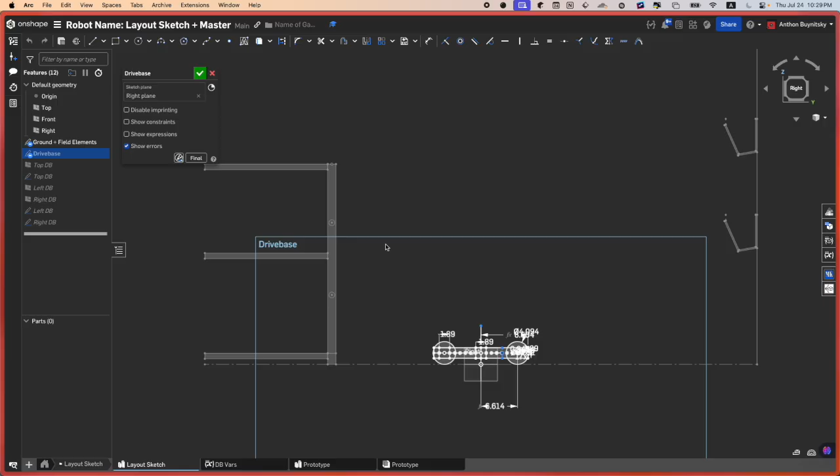And yeah, so we'll be doing a layout sketch of an intake mechanism for last year's... Raj, what was your game called? Into the Deep. Yeah, from the Into the Deep season, the last season you could call it. We'll just be intaking from the submersible, and that'll be it for this video. Then we'll 3Dify quickly in the next video, so it shouldn't be too bad.

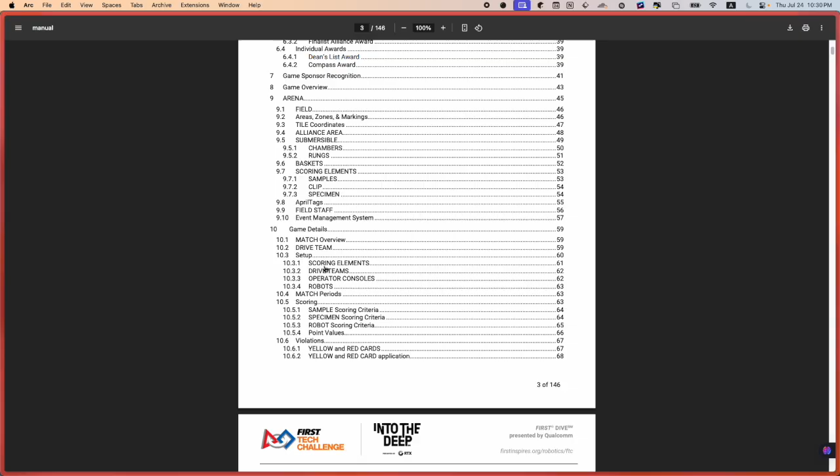Okay, so I did miss a couple of things in the drive base doc from last video. I forgot to include the extension limits for the robot and also the height limits, if there are any. So we're gonna go back into the FTC game manual. And now we have to find the extension and height limits for this game. Game design, game rules, robot construction. There you go. Just keep scrolling down.

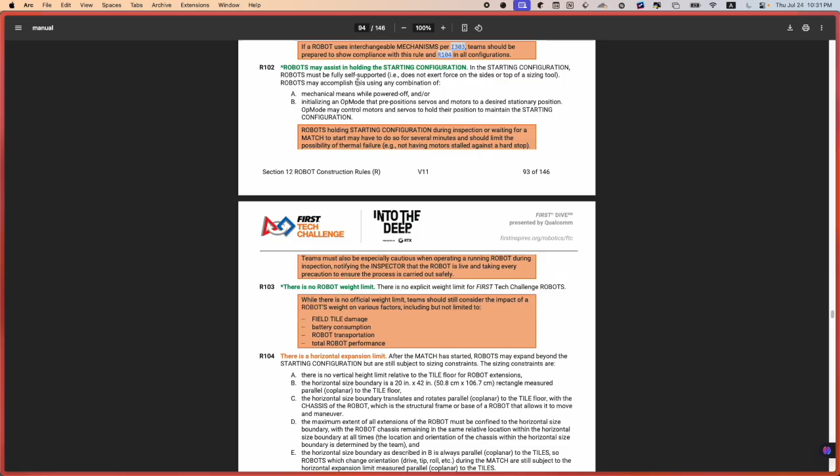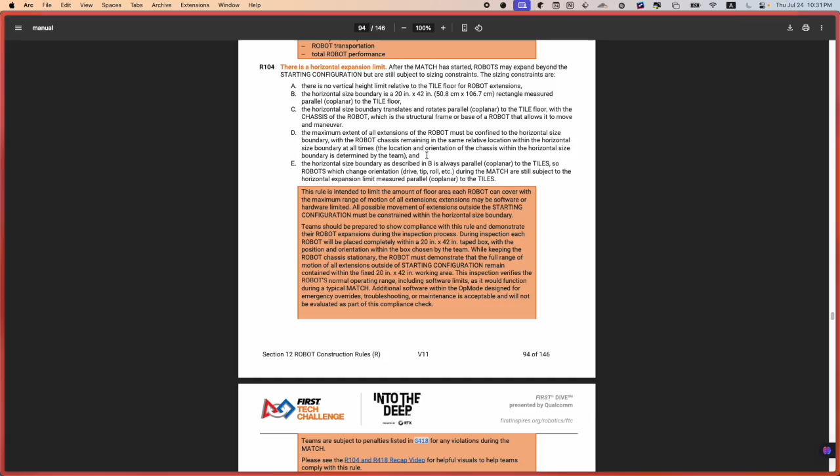There is a horizontal expansion limit. So we're just gonna take a look at this one. The horizontal size boundary is a 20-inch by 42-inch rectangle measured parallel to the tile floor. I'm trying to get this to 20 inches. Okay, wait, hold up. So you guys have 42 inches from the side of extending, including the chassis.

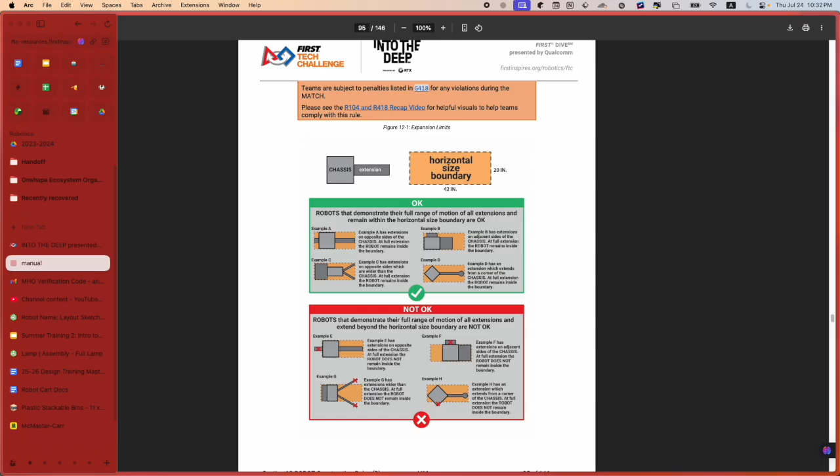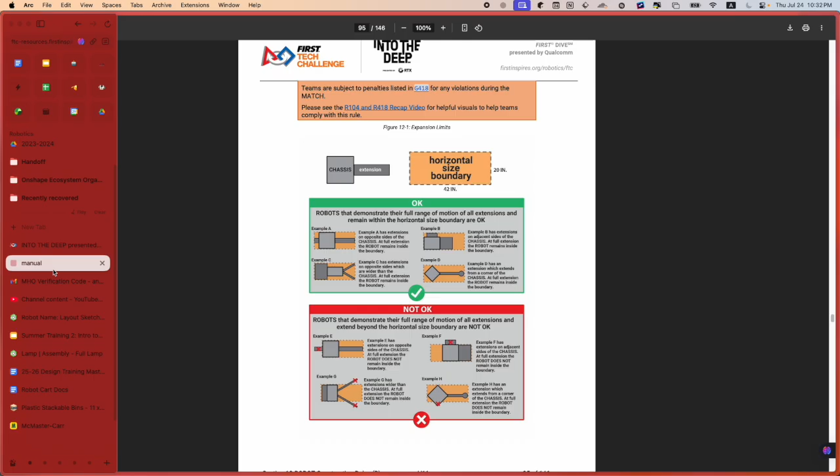Yeah. What typically happens is you'll extend forward one way and extend up the other, and the up extension is basically not there. So maybe you may have to flip around back, but it's typically not outside the drive base area. Okay, so it's just 42 inches on the side, basically. I'll just quickly draw it out. We can quite literally just make a little box like this. Is there a height limit? No height limit. Okay.

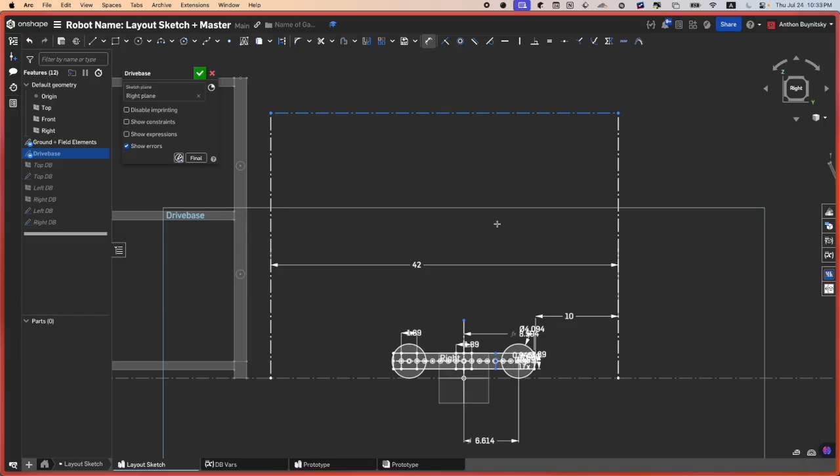So it's 42 inches including your chassis on both sides of the bot, which is pretty interesting. Raj, do you think we should leave some space on the other side of the bot, or just go full 42 inches to the left? I think maybe you can leave a little bit of space. Okay, so we'll do like 10 inches, right? And then from here, I feel like this makes sense. So 42 inches, or maybe make it a little bit smaller on the other side. This is actually a great idea.

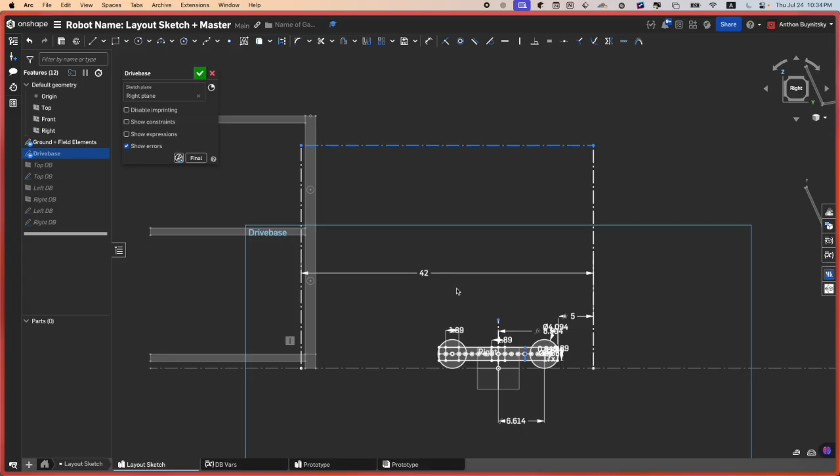DB extra extend. We'll just make a variable for that. What do you think about 8 inches? Maybe five is good enough, to be honest. All right, let's do 5 then. There you go. So that's how 5 inches looks. Okay, cool.

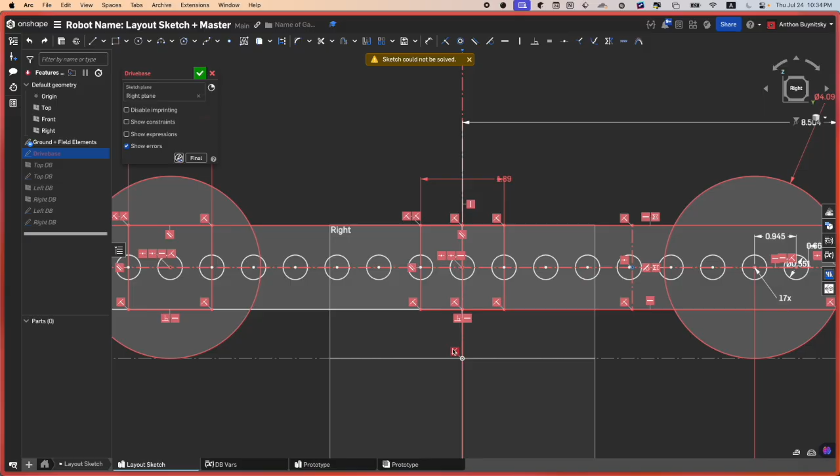Now we actually have to move the robot, the drive base, over to the submersible, as you would in real life, because you can't really do anything with it right now. Right now it's fully constrained, so I can't move it closer. So I'll forcibly make it error and find out what is constraining it. I think it's just this one. There you go. I hovered over this and saw that this vertical construction line was coincident with the origin. So I deleted the coincident constraint, and now it's able to move closer to the submersible.

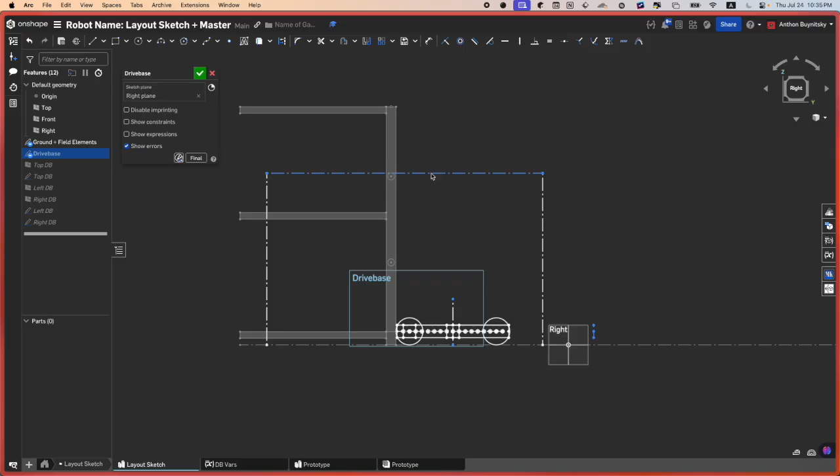Okay, so what we're gonna do for now is we're gonna pretend like we're fully up against the submersible, right? Raj, what are your thoughts on this? Should we make the intake as if you guys were fully up against the submersible, or should we make it so it's further away, like instead of tangent to it? So you can add a little bit of clearance in between. Yeah. This shouldn't be a lot because we were basically touching it. Okay, so maybe 1 inch. Yeah, all right, that's good.

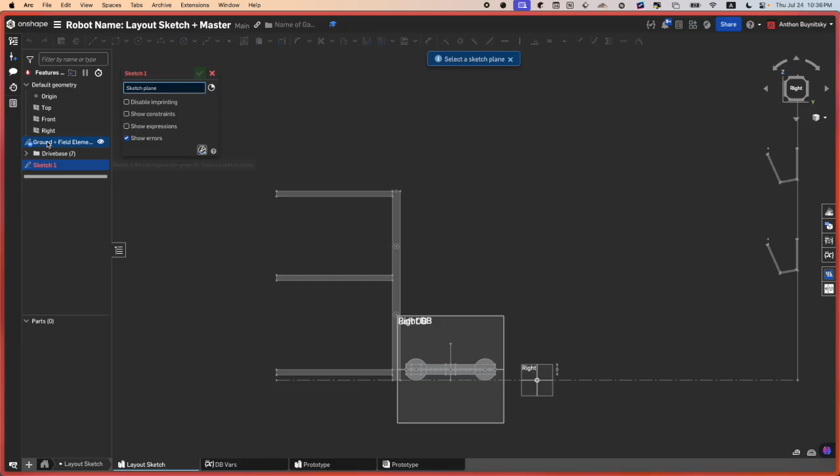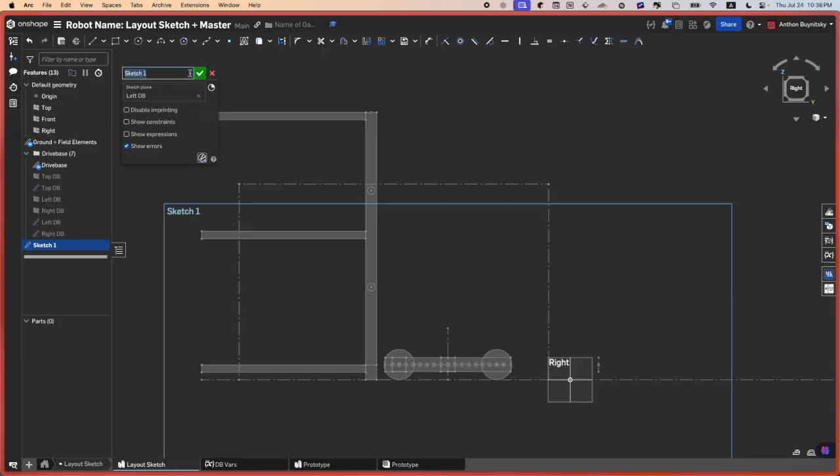Cool. Okay, so that is our boundary set up, the outer extension limit, and I would say that is it for the drive base. Now I'll just put all of this inside of a folder called drive base. Remember, use folders, they are really, really useful. Okay, so there you go. I will also get rid of all the planes and all of the 3D sketches that we made, because for now I'll only be working in the side view, so I'll only need the side of the drive base. Okay, so we'll do intake layout, just like that. And now we can start making stuff.

So today we're gonna try to make an intake that uses Misumi slides and then has a roller claw at the end of it. Raj, do you want that whole thing to be rotatable, or will you guys just turn the robot around? I'm not sure, I think turrets are popular. Wait, what did you mean by rotatable? Like a turret. Oh, just turn the robot around. Or actually, the outtake should ideally be on the back. But we can just do the intake for now. Oh, this is the outtake on the back.

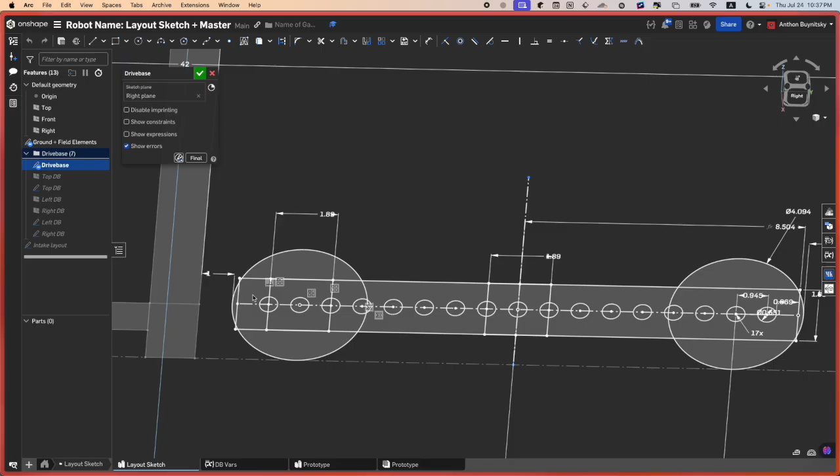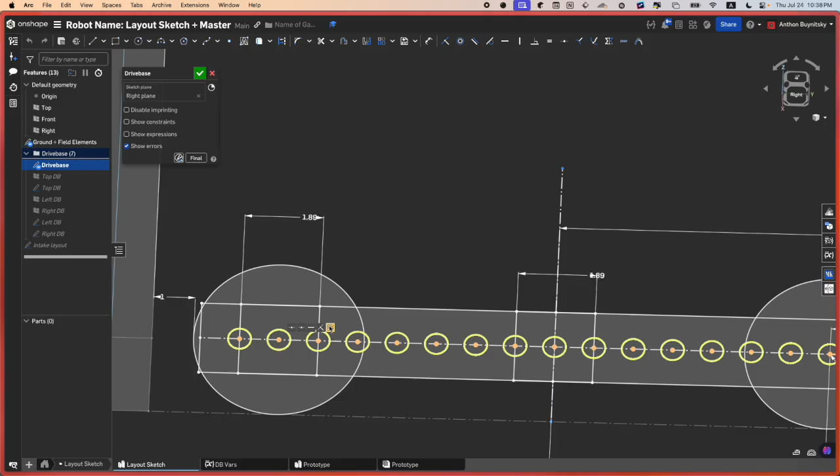Yeah. So we're currently back up against everything, but that actually should be a pretty quick change. This is why you want everything to be changeable when you're making a sketch. Because now what you can do is, I'll hover over this point, so I'm assuming this center point rectangle is coincident with the center of this circle. So I have to find that constraint somewhere, and then I'll have to change it. Man, this is pain. I should have made the submersible on the other side.

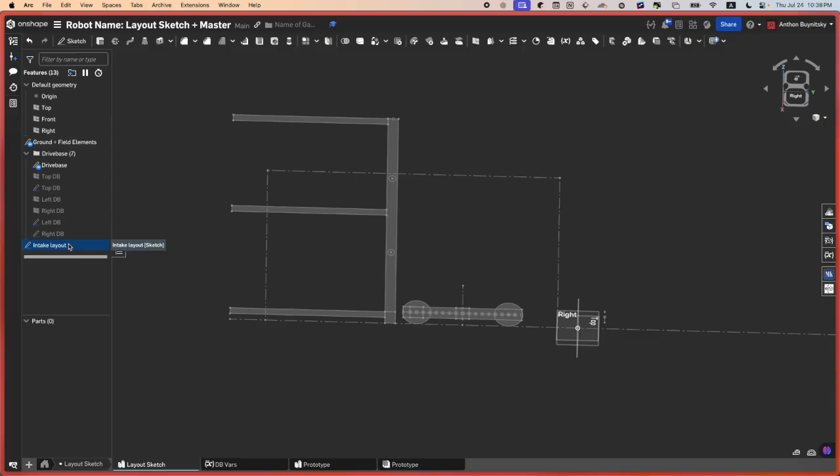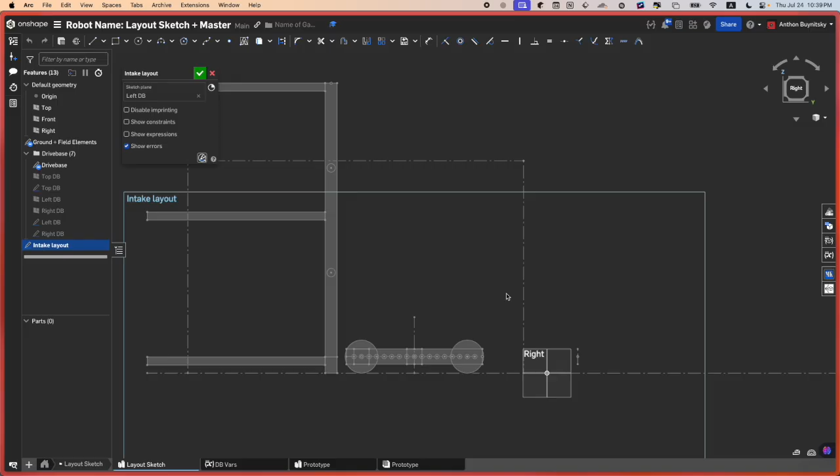Yeah, so this is why making sure your drive base is facing the correct way is important. Because I honestly just yoloed this without thinking prior to making my field elements. Because in FRC it's a square drive base, maybe rectangular, but it's mirrored across. Here it's not, but Raj, is it fine for now if we make everything on the back? Yeah, I think that should be okay. We're not actually making the robot right now. Okay. So just make sure you layout sketch your robot facing the correct way. This might require you to make two different layout sketches for the drive base, one facing backwards and one facing forwards, depending on what you decide for that year. It just depends.

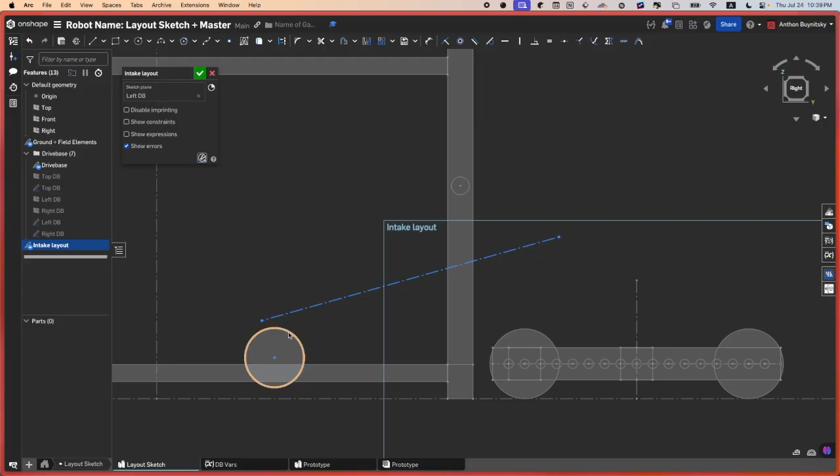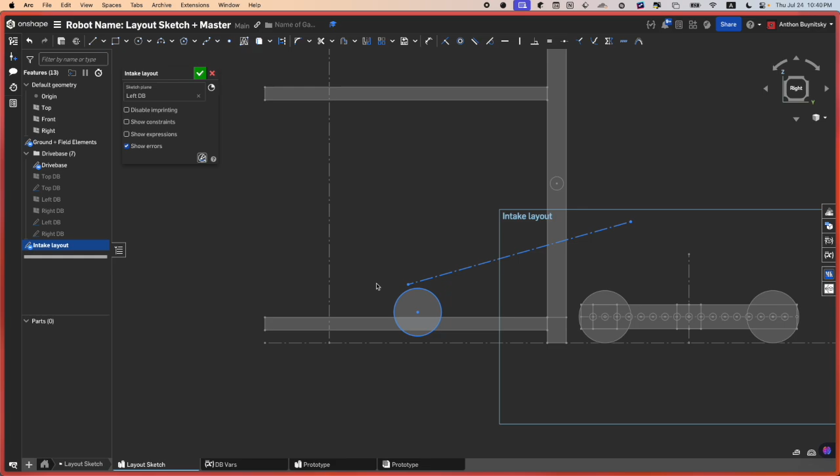Okay, so intake. We want to have, as I said, a roller claw with some Misumi slides going out and in. So I'll just start drawing in lines. For the Misumi slides, do something like this. Again, I'm completely eyeballing this. We will figure everything out later on, like the dimensions and where to actually place it relative to the drive base. And since it is a roller claw, we will need to create a roller. So I'll just leave that there for now. You want to sketch your robot out to its very max potential. What I mean by that is you want to make sure that it can grab a sample very near its extension limit.

The reason being is because if it can grab a sample over here, then it can definitely grab a sample over there, right? All you need to do is move your robot back, possibly just retract the Misumi slides and rotate the mechanism here. But just make sure you can do its very max.

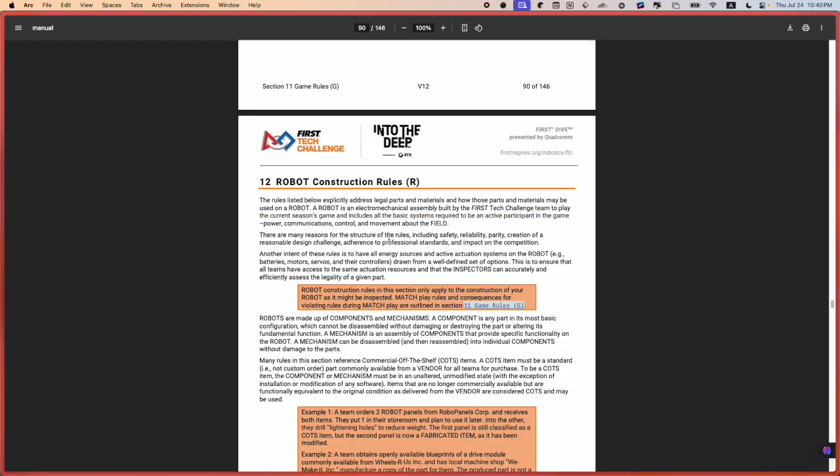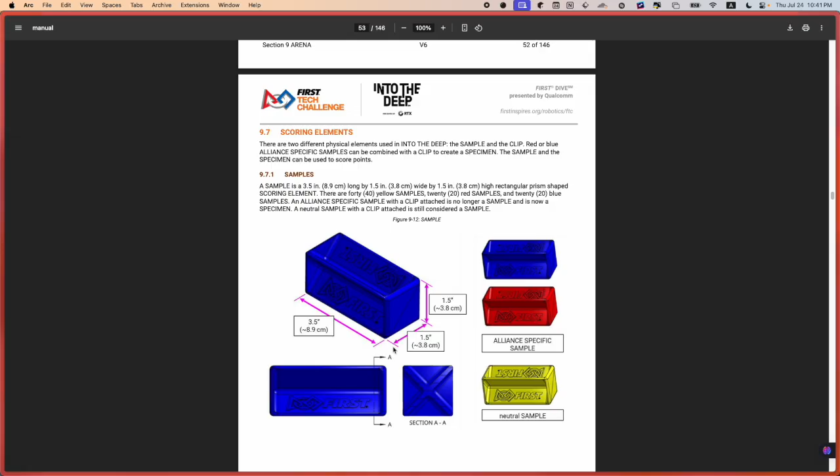So I actually do have to make a sample now to make my intake. So that was a loud one. So what I'm gonna do is take a look back at the manual and find the dimension. I'll probably skip this part. Oh, there it is. 1.5 by 3.5. Okay. So we'll do 1.5. Holy, that is small. And 3.5.

Okay, so there's my sample, and right now I'm gonna just place it an inch inside of our extension limit. Raj, does an inch sound fine, or is that a bit too far of a stretch? Is it an inch inside the extension? Oh, like the sample position. Yeah, like where the sample is. I think that's fine. Yeah, those are good. All right, so we'll stick with that.

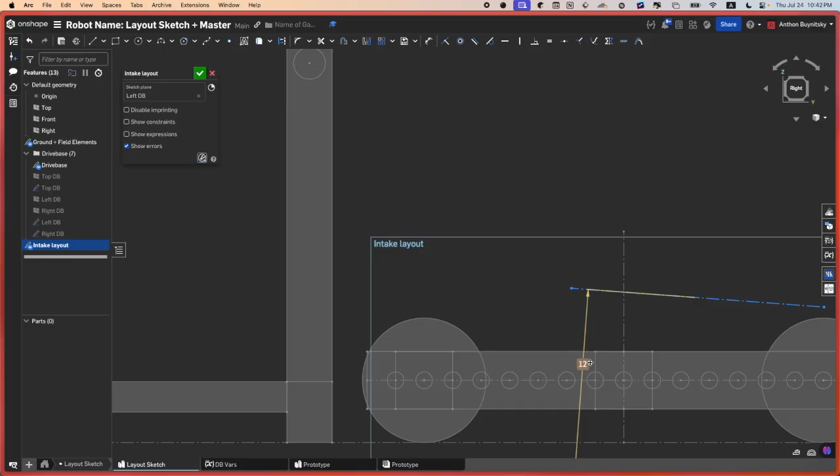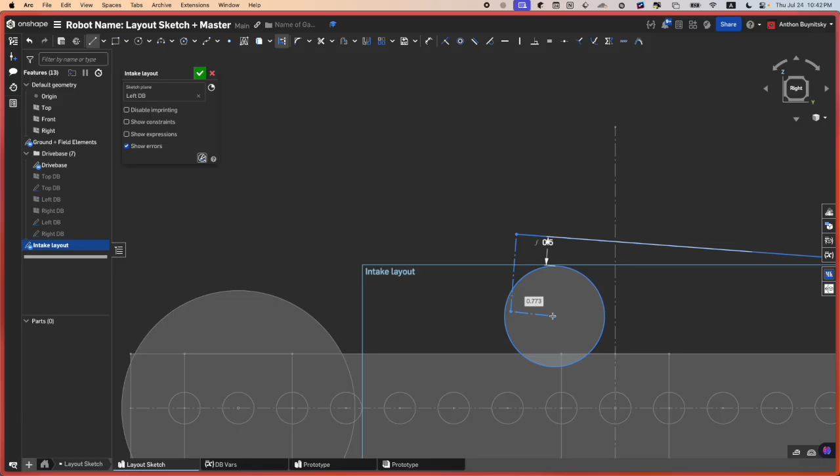And now I'll just create some temporary dimensions between the Misumi slide and the intake wheel. So I'll do maybe an inch over there, maybe even half an inch. No, not 12 inches, half an inch. Since this point marks the very end of the Misumi slide, I'll place the wheel just to make sure I have enough material to work with. Oh, it's not making the correct dimension that I want it to. So here, I'll actually make this not a construction line, and I will do something like this and like that. So there you go. And now I'm gonna place a dimension here where it's 1/2.

The reason why I did this is because when I tried to dimension these two dots, if you look at this area of the line of the Misumi slide representation here, you'll see that the white line of the dimension is not perfectly perpendicular to that line, and I want my dimension to always be perpendicular to that line. So that's why I created a construction line going down here that's perpendicular, and another one going out to the right that's perpendicular to this one. So this line is perfectly parallel with this line, and then I just dimension this to be a half inch.

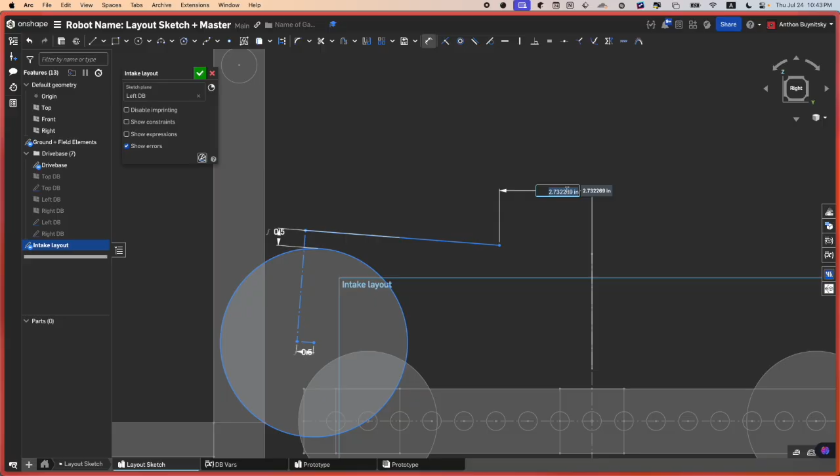Okay, oh, that is way too much. I also probably want my Misumi slide to start, for now I'll dimension it to be 3 inches over there, and 5 inches up here. And then I will make my wheel, if we go onto goBILDA, and then go into Wheels and Tires, and not the hogback wheel.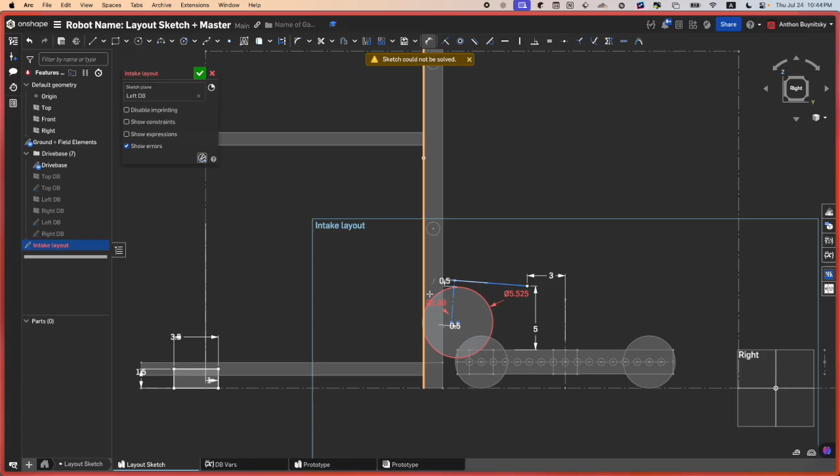Raj, which wheels did you guys use for your intake last year? We use the gecko wheels, the small ones. 48. Smallest, yep. Okay, so we'll put a 48 gecko wheel on there. It's a 48 millimeter diameter, so I'll just dimension this diameter to be 48 millimeters. And I gotta delete, I dimensioned it twice. Okay, so now we have a very basic thing going on with the Misumi slides.

And now here is the important part. You have to figure out in your layout sketch the compression of the sample. Compression is very important with FIRST in general, right? With FTC, with FRC, and I'm sure even in FLL. It's a pretty simple rule. There's one very important rule when doing compression.

If you have a hard game piece like the sample, you want a wheel that is a soft compression, because then it can squeeze really easily. And vice versa, if you have a really soft game piece, maybe like the cone from 3-ish years ago, then you want to have a hard intake wheel. That's the main rule there.

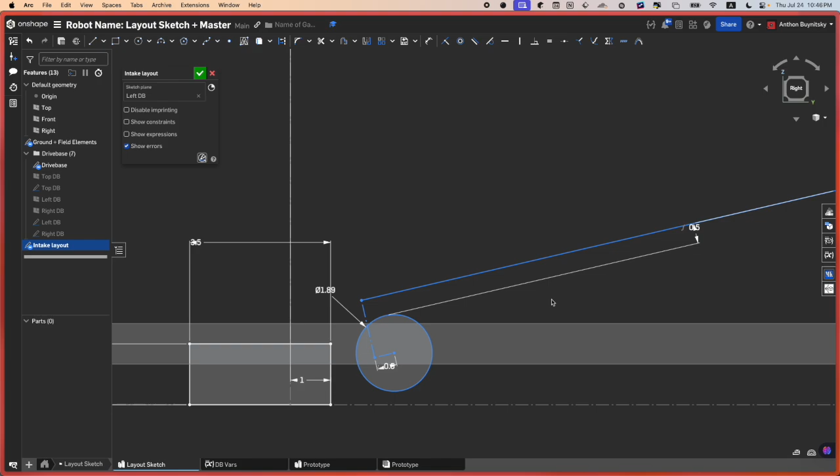You don't want to have a soft intake wheel and a soft game piece. That's just gonna mess up your compression. So the way you find your compression is honestly just prototyping. Like maybe make a rod and then put some wheels onto there for different distances and see how the game piece interacts with your wheels.

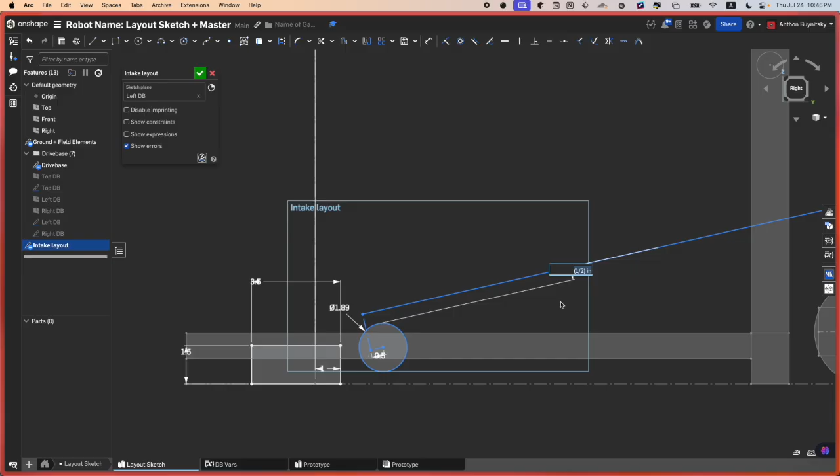Okay, so the plan here is for the sample to get wedged in between this wheel and probably something in between the Misumi slide as well. Raj, do you have any recommendations for that? Yeah, I think that should be fine. Okay, so we'll do a plate, and to make sure that my sample fits in, I have to have at least maybe like 1.5 inches of clearance.

And then what I'll do is, let's see. So 1.5 is probably, honestly, way too much, since this is just gonna make the sample perfectly fit inside of this area over here between the Misumi slide and the intake wheel. I want the sample to actually be pressing against the intake wheel to make sure it has a strong grip. So what I'll do is maybe put like a 1/4 inch of compression. This means that I want this distance to be maybe 1.25,

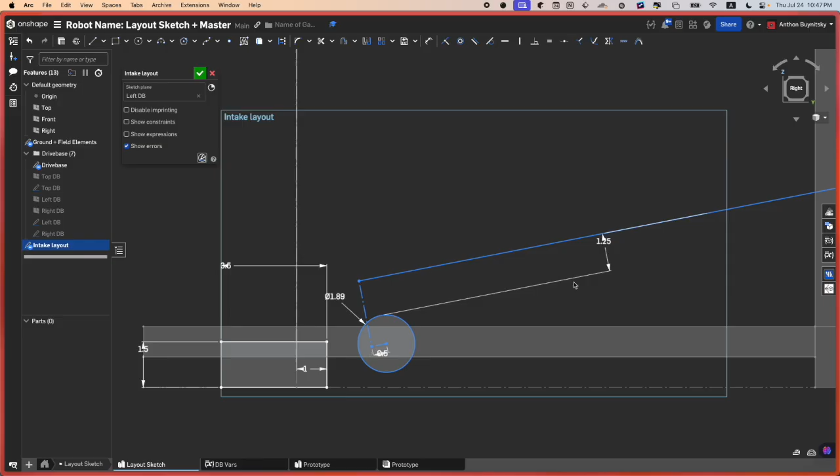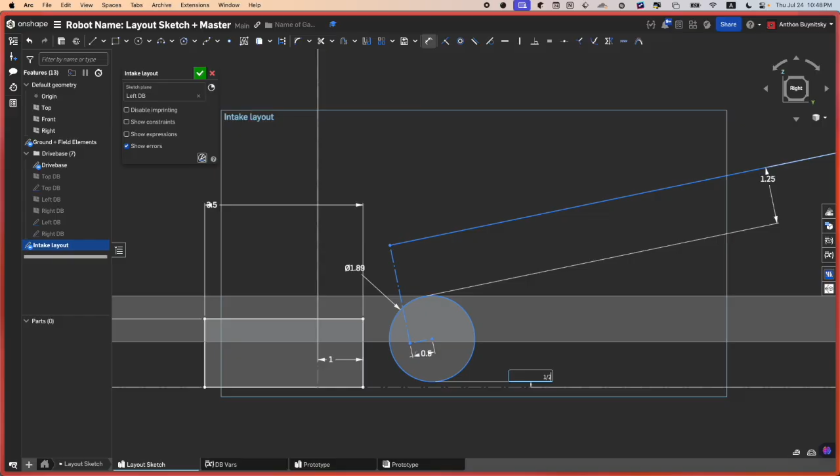1.25 inches. All right. Now, right now we have to layout sketch how the intake will be intaking the sample. So, of course, you don't want your wheel to be rubbing against the ground. That will be pretty bad. So I will add maybe a 1/8 inch of clearance. A 1/8 inch is always a great place to start whenever you're thinking about clearance between two parts. It's honestly a standard at this point, and it usually works.

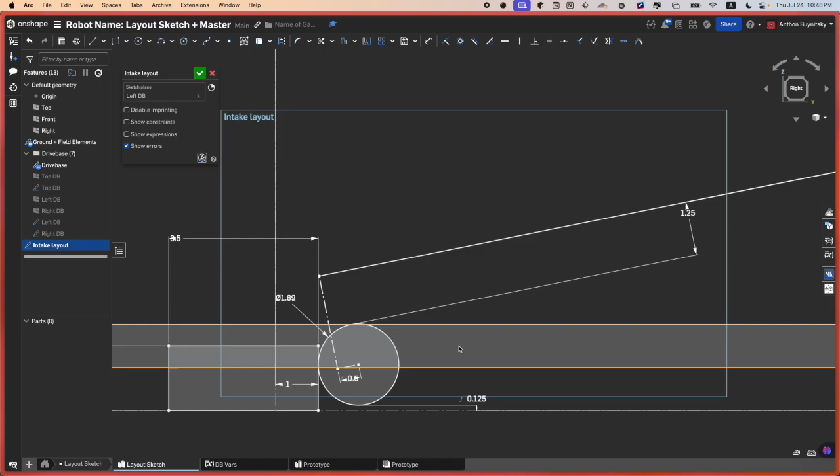Okay. And now when I'm intaking, of course my intake wheel will be tangent to this line, right? Because it'll be touching it, and hopefully it gets in there. So what I can do actually is make this even less of a distance from the ground. And so what I'm hoping will happen is the sample will climb kind of on top of the wheel and then wedge itself in between the Misumi slide and the intake wheel. So honestly, this intake probably won't work, but for the sake of this video, we'll roll with it, just to see how layout sketching works and how you should plan everything out.

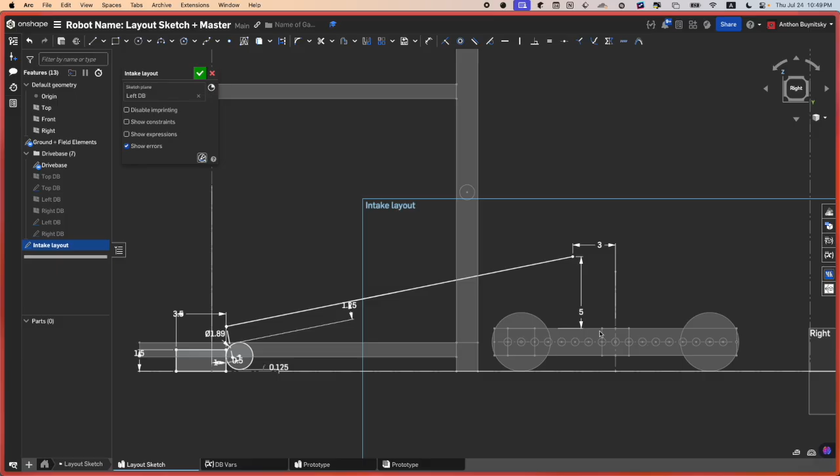Okay. Also, the placement point for the Misumi slide, I did just kind of go with my gut. But you will have to think about it and talk about it to figure out the most optimal spot to mount it. All right. Now we do want to make this point rotatable, so we want to have the whole Misumi slide rotatable. So what we'll do is show its rotation trajectory with a construction line, as we did a couple of videos ago when we were making that little, I think, phone stand. Yeah.

So the furthermost point of this Misumi slide assembly and intake assembly is this point right here that is showing when I hover over it on the intake wheel. So I'll just press that, and now it shows the trajectory of my intake. All right. Now notice, this is again very simple. I don't even have any parts modeled out over here that will hold it up. You can probably figure that out later on, maybe even in the intake document itself.

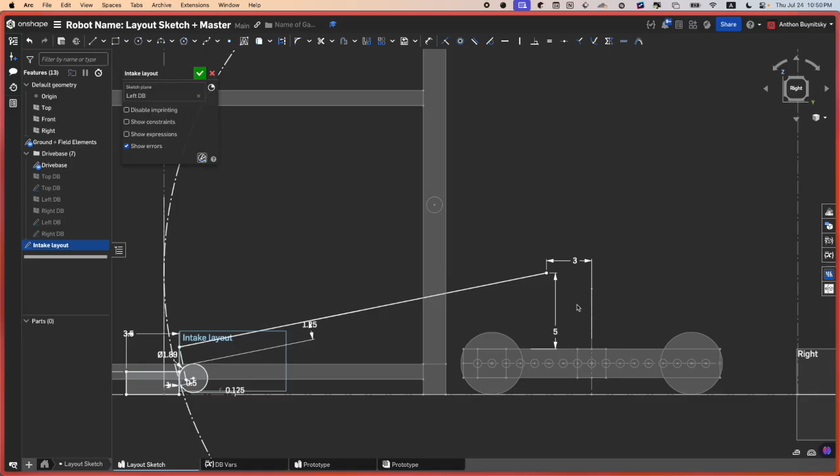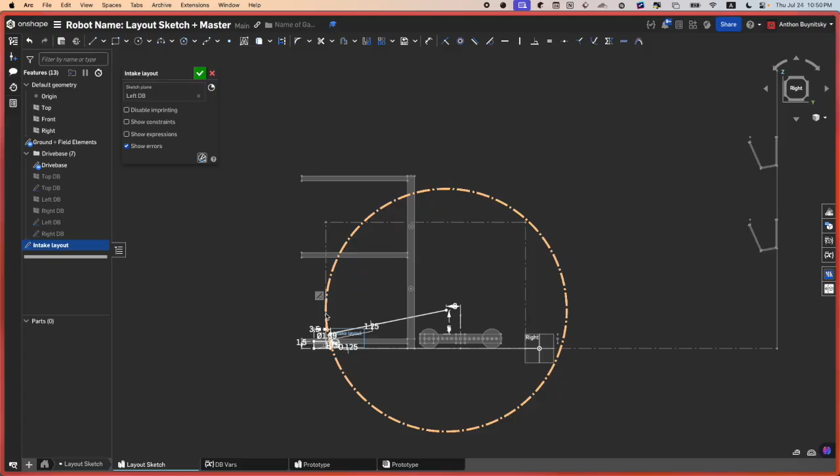But yeah. Okay. Raj, do you have any questions so far? No questions so far. And then another thing I did just notice is we're cutting it very close to the extension limit. But what you guys will probably have to do is retract the Misumi slide and then rotate it around. All right.

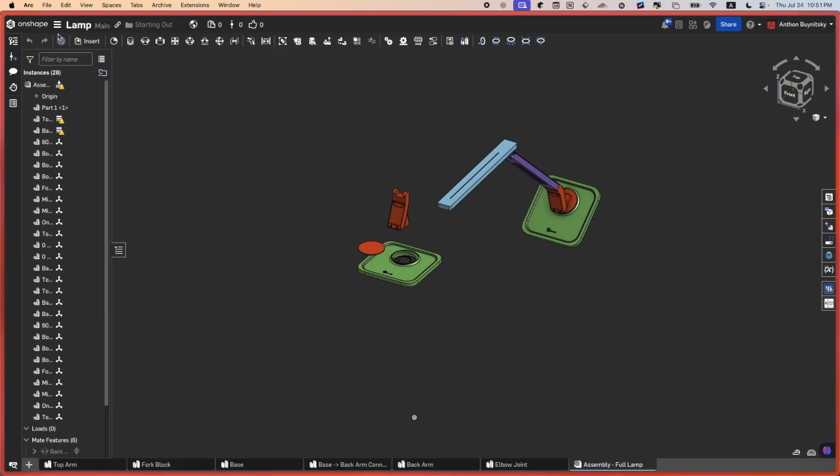Cool. Let's look at the Misumi slide just to make sure that everything works out. You want to make sure that your distances for the Misumi slide are actually reachable by it, right? So 24.797, I need to make sure that there is a Misumi slide that can reach 24.797 inches in extension. So this one, 180 millimeters. Okay, how much is that in inches? I need that in American, but man, I lost my document.

Okay, so I'm just going to check that 24 point whatever inches maybe is. I don't think it is. It's probably way too long. Yeah.

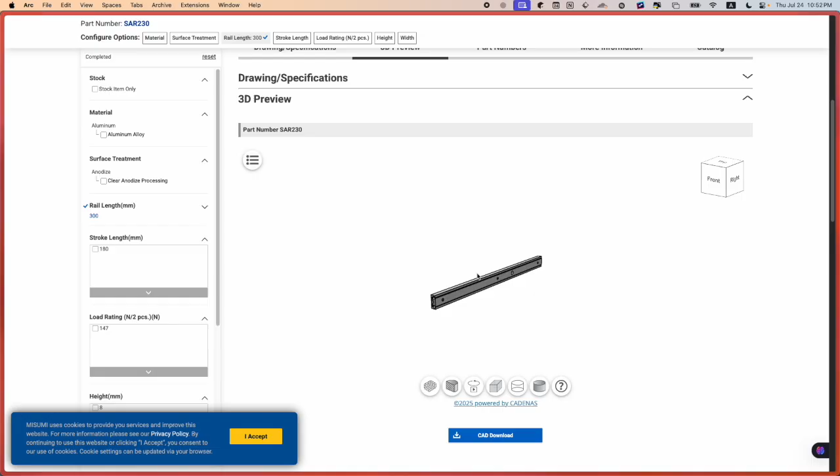Raj, are there any longer Misumi slides? What do you mean by? I mean these, you can get them to stack together, like that's the idea. Oh, I see. Oh yeah, okay. I see, alright, cool.

And then you guys might not even need this whole stroke length because you might just intake it somewhere inside of here anyway, since there's samples all inside of the submersible anyway. So, very simple side layout sketch. It should honestly be more - you guys probably will have a lot more complexity in your layout sketch for the intake later on in the season. But I'll be there to help you guys out, so it should be fine.

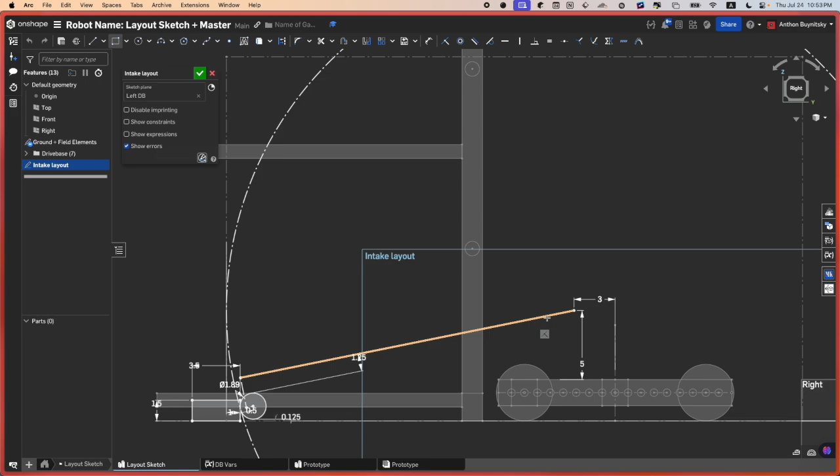Okay, now we're just going to go on to actually making it 3D. So the Misumi slide, will honestly just make it a square in the side layout sketch. So something like this.

Yep, and then make sure these two lines are parallel to each other. Cool. And then we have to find out how thick they are, right?

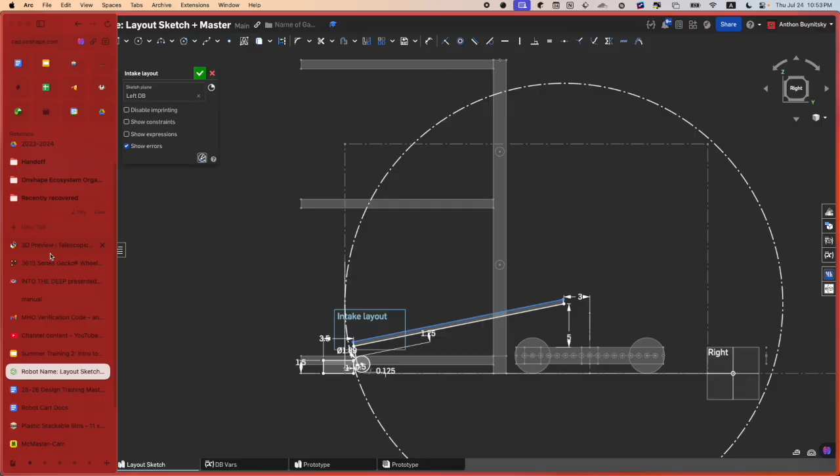So Raj did say we can stack them, so you will have to figure out the specific spots of where you're going to stack it. So in reality, what you probably will have is something kind of like this, where this is one Misumi slide going out here. Raj, will you be stacking them? I'm assuming side to side, right?

Not on top - like in this case it makes sense on... I mean yeah, you can do side to side. It'll probably be easier for this case, okay, and most likely we'll be doing that. Alright, yeah, so it will be side to side. So I lied - you'll just have to create a little rectangle to represent the side sketch of the intake.

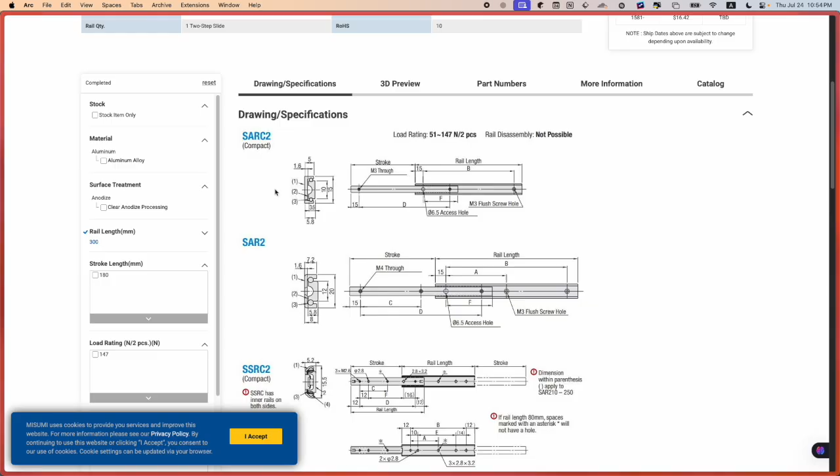Okay, now going back to, we need drawings and specifications. So from the side view, looks like it's about... which one? SAR 230. It doesn't have SAR 230 here, but we'll just take a random one.

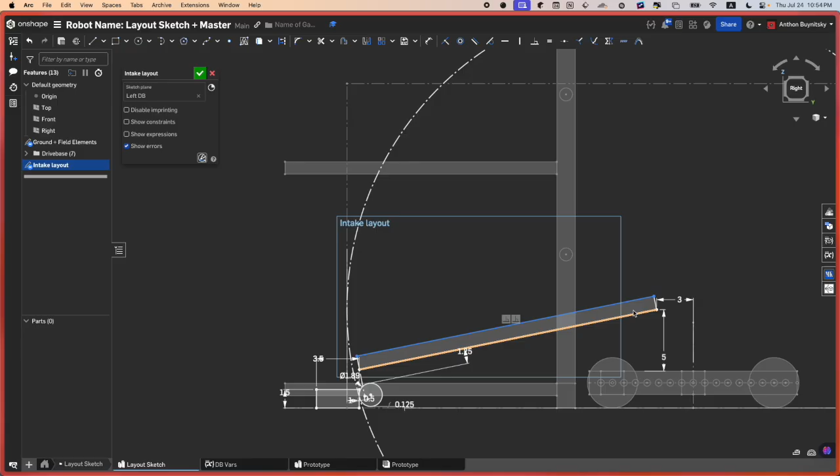Let's see, it says 15 over here. I'm assuming that's millimeters - I think that should make sense because they use millimeters for everything else. 15 inches would be a pretty big Misumi slide anyway, so I'm going to make this 15 millimeters.

Cool, alright, that looks pretty good to me. And then so we'll do, yeah, okay, so we'll do that.

And then now what we can actually do is we could make another sketch where we have the sample just in its optimal intake position. So you generally want to CAD your game piece from touch it to own it, right? So here's my sample, I will just use equal constraints to get all the dimensions from the other sample that I made in the other sketch.

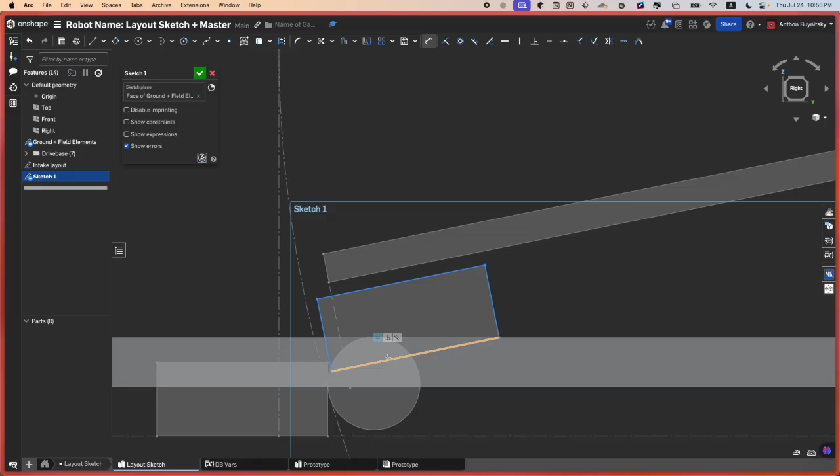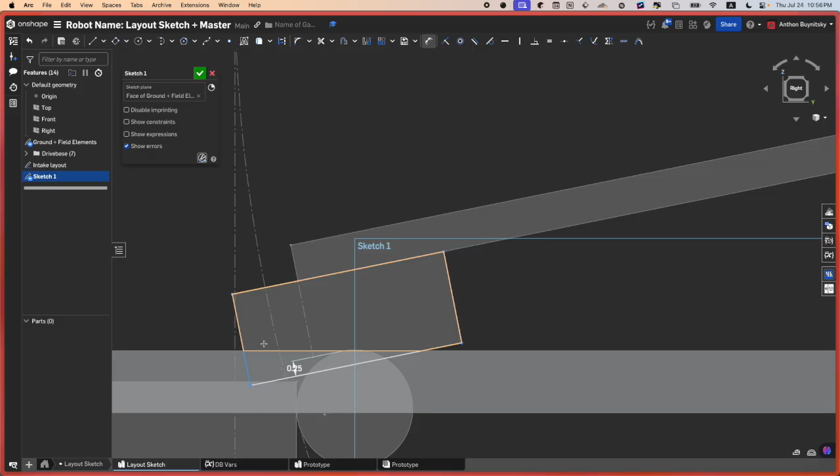And now we did say a quarter inch of compression, so in an ideal world it will probably be a quarter inch of compression on the wheel, because of course it probably can't go through metal. And if it can go through metal, then there's something wrong with your Misumi slide. And honestly, I would probably have it intaked maybe about halfway through.

So what I'll do is, again, this is where construction lines come into play a lot. So instead of just dimensioning it from this point to this line and making it 3.5 by 2, I could do a couple of construction lines and find the middle of this circle somewhere. Where is the middle of the circle?

Okay, for now I'll do this - find the midpoint, find the center point of the circle, and then make this construction line parallel to this construction line. There you go - now it's in the middle, and now it's going to be moving with your assembly. Like if you change the length of your Misumi slide, then this whole sketch will also change in length. That's why you want to use construction lines instead of dimensions, and geometric constraints. Alright.

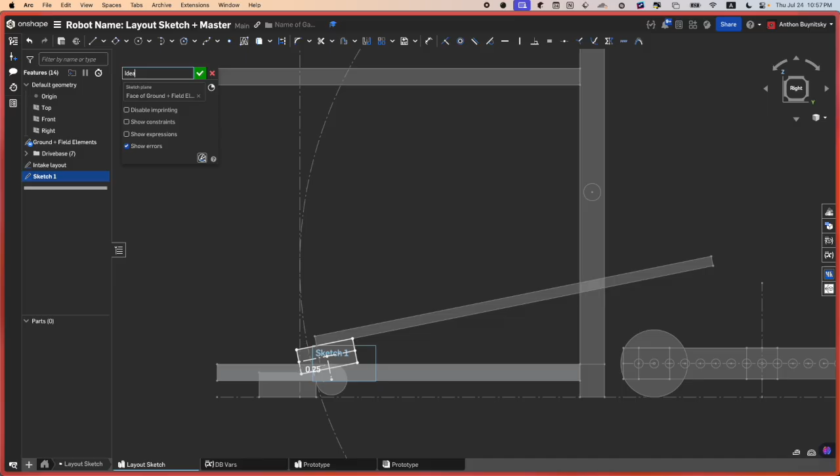Cool, so I'm going to make this ideal, so own it, right? And then what I'll do with this one is I'll name it intake layout, I'll name it touch it. And then I'll make another folder called intake where I'll place these two sketches in, and I'll move the rollback bar up below own it. Okay, so that so far is the intake for us.

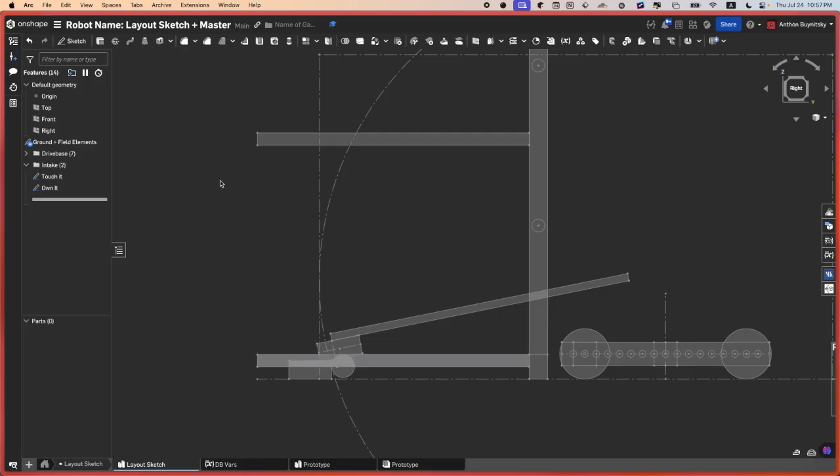Now we have to make the sketch from the top view. So what I'll do this time, instead of making a plane in the middle of the Misumi slide as we did all these times, I will make it on the bottom since it will be coming into contact with the sample. So I will make a plane like that. I'll call this bottom Misumi.

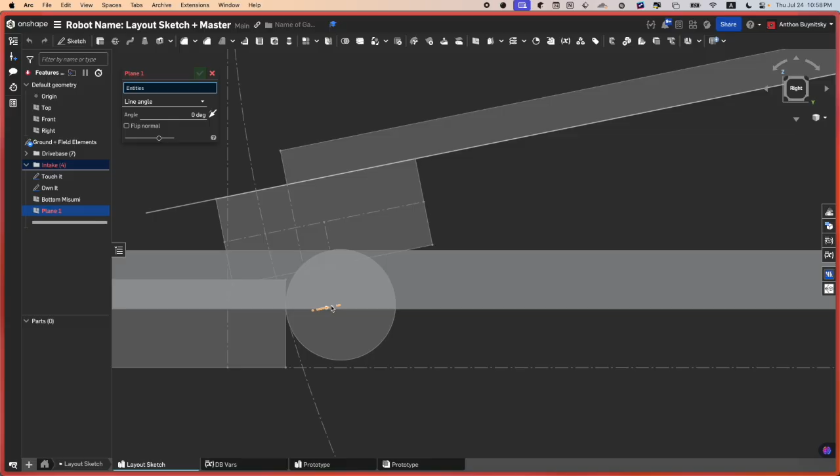And then what I'll do is, going back to my touch it doc, I'm gonna make a construction line. Oh, we actually already have a construction line there. Okay, cool. And then what I'll do is make another plane on that construction line, kind of like this, that is 90 degrees, so it's facing upwards, parallel to this plane as well. And call it intake wheel.

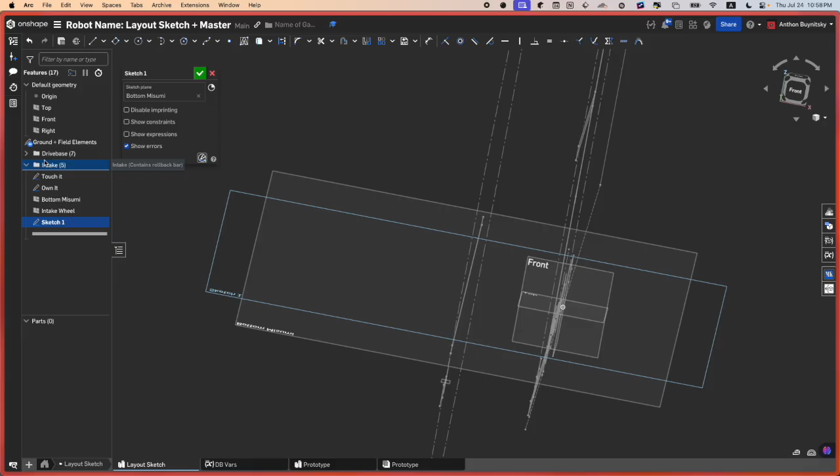All right, now it's actually going to be a bit more different. We have to CAD this, as Raj said, you guys will probably be stacking the Misumi slides, so we will have to very basically CAD that.

All right, and I wonder why it's... did I put it on the wrong plane? I did put it on the wrong plane. If you go back to your touch it doc, instead of putting it on left DB, make sure it's on the right plane. And yes, you can very easily switch sketch planes like that, and it'll preserve all the sketches, so pretty cool. Okay, there you go, that makes a lot more sense.

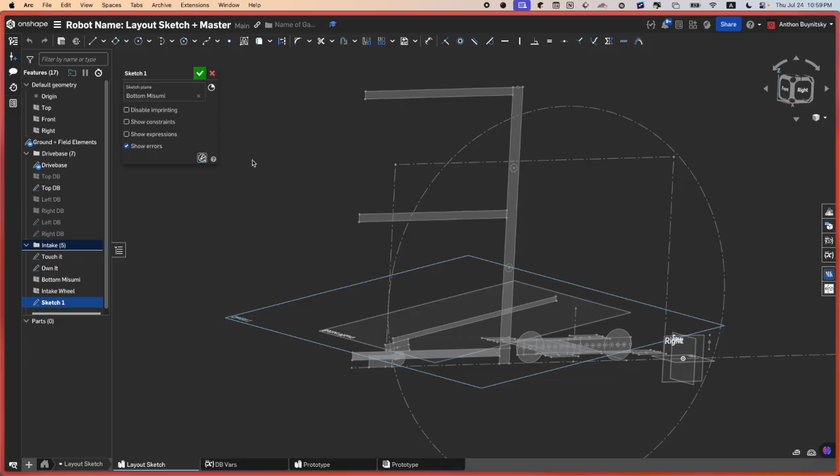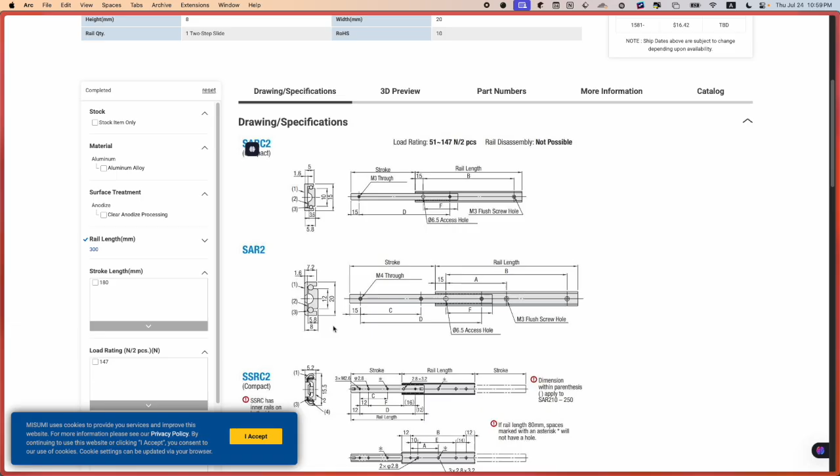So back to sketch one, bottom Misumi, and I'll just name this top Misumi. Okay, now if we go into the Misumi drawings and specifications, from the top view we'll be looking at, let's see, so it's 180 millimeters per Misumi slide.

So let's figure out how many we need first. We can do this with a bit of simple math, honestly. But instead of doing that, what I'll do is I'll just use construction lines to quickly represent the Misumi slides that I'll need. So since this is on the same plane as this line over here, I can use the points on it as we've talked about previously.

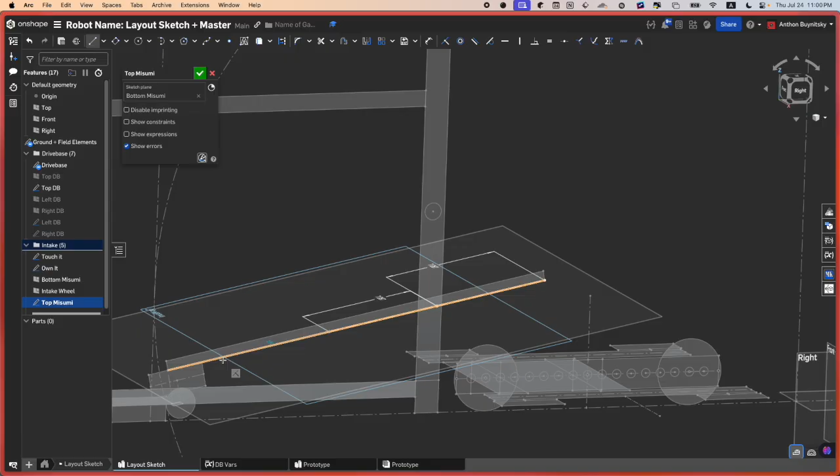So for now, I'll just make 2 lines real quick, and each line represents a Misumi slide. So this line over here, I'll make 180 millimeters. This line over here, I'll make 180 millimeters. So we are short, and then this line over here. And if you guys notice, I am making a mistake here - I could easily just equal them instead of dimensioning the same thing. And then we have a bit of distance over here that we can cover.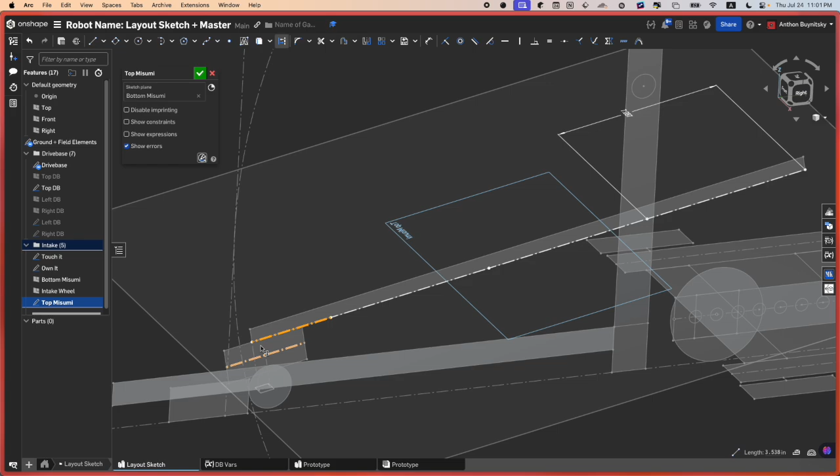Now, what you could have done as well is just not worry about this distance at all, and just intake the samples closer to the robot, and then you'll save some weight here. Which is actually, yeah, let's just do that actually. And it'll show you guys how changeable your layout sketches actually really are.

So if we go into the touch it, own it dock, what we can do is just easily change the distance we place the sample inside of the frame perimeter. So if we change it to 5, for example, everything in my other docks should change as well. So going into the top Misumi, you'll see that now we have 3 Misumi slides very easily, and they can very easily reach the sample.

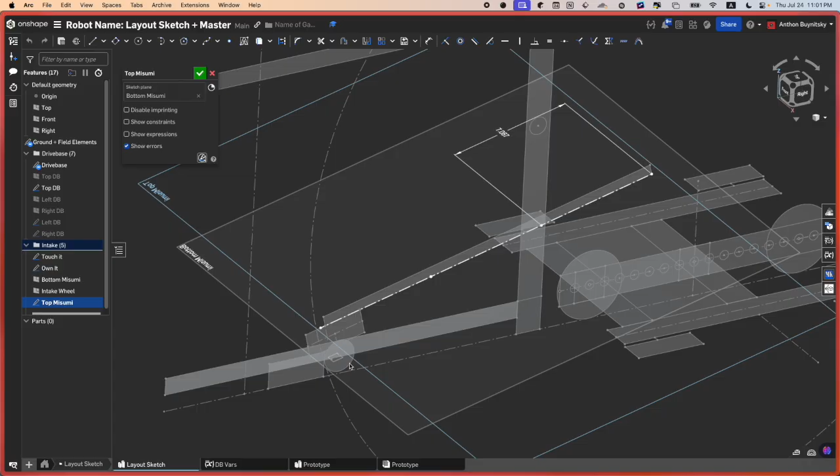All right, Raj, any questions before? Nope, no questions. Okay.

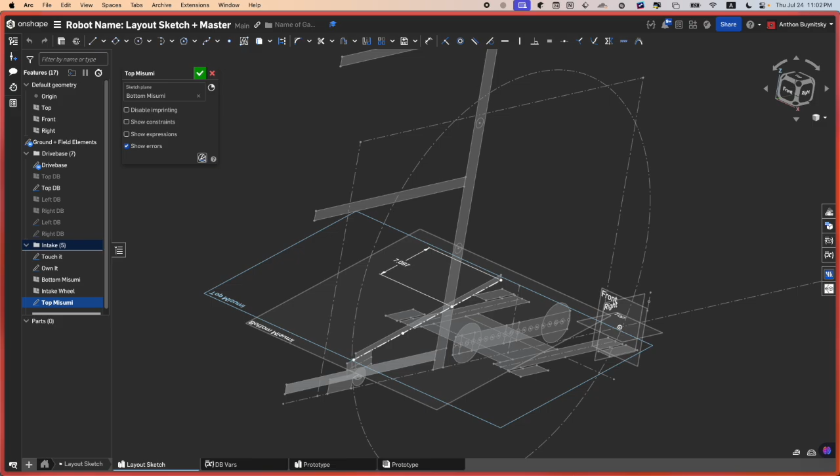All right, now Raj, I'm assuming you're gonna have - is it 1 set of Misumi slide or is it 2 sets, like you'll have 2 on either side? 2 on either side. Okay, cool. So I'm also just gonna quickly eyeball that.

They will most likely be from the top down view, Raj, right? Like, for example, if you stare straight at the intake from the front, you'll see this, right? Like the front of the Misumi slide.

Okay, cool. So the width of the Misumi slides is 5.8 millimeters in total. I'm just gonna make it very basically, 5.8 millimeters. And then what I'll do is use a lot more construction lines to constrain my Misumi slides.

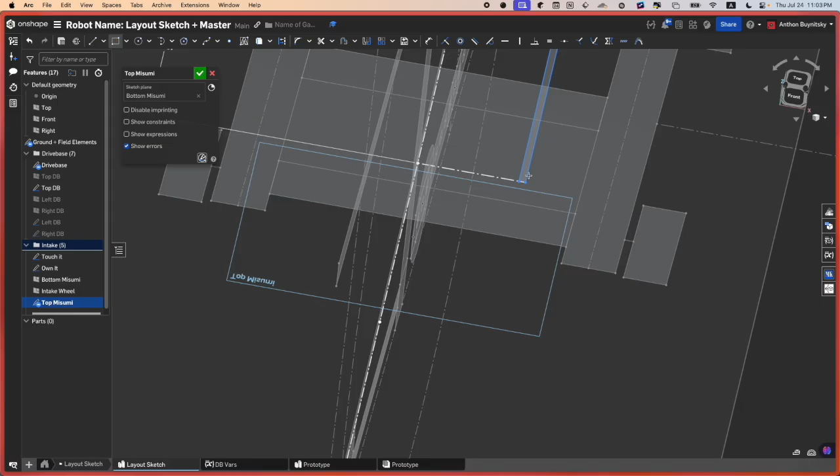Just to not model the length again, this way I don't have to use the 180 millimeter dimension again. I can just easily use these lines over here. And then I just have to do that a couple more times, so I can just do this.

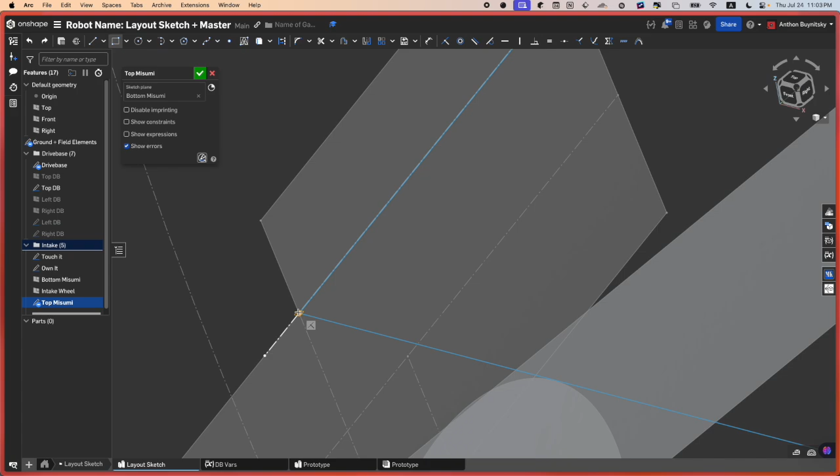For this Misumi slide, we don't need its full stroke. So instead of making another corner rectangle that is horizontal with the very end point of the Misumi slide, I'm just gonna make it as long as it needs to be, which is this point slightly below the max extension of the Misumi slide. I'll just drag my mouse out and there goes the horizontal constraint with the orange dotted lines. Then I'll just click, and there you go. We have one side of the Misumi slides.

Raj, I don't feel like I'm doing this correctly. You're gonna have to. They're gonna be overlapping a little bit, correct?

Okay, so here are the three Misumi slides that we made, and now we have to decide how wide we want them to be from the center of the bot. Honestly, I'm pretty comfortable with 3.5 inches. The sample itself is 1.5 inch wide, so honestly, 3.5 inches might be too much. I might do 2 inches instead, maybe even less.

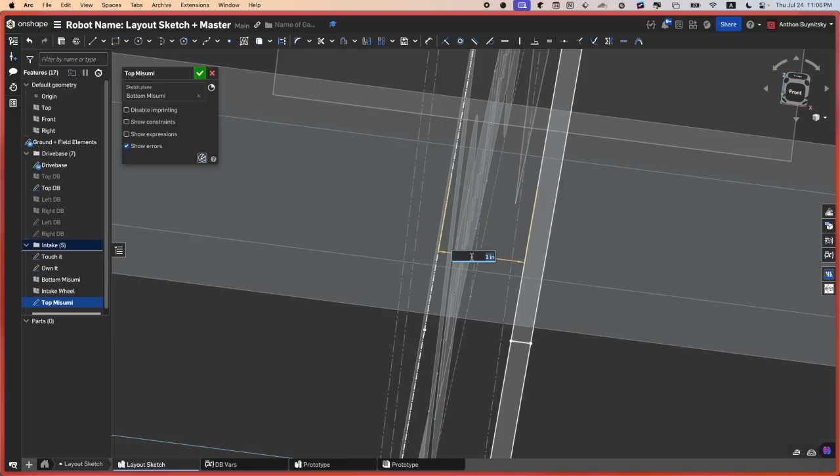I'll do 1.5. So my thinking here is, the sample is 1.5 inches in width. If I mirror this set of Misumi slides over to the other side, the total distance in between will be 3 inches, which leaves us with about 1.5 inches of play, which I think should be good. We could try 1 inch, which leaves us with half. We'll do 1.25, split the difference.

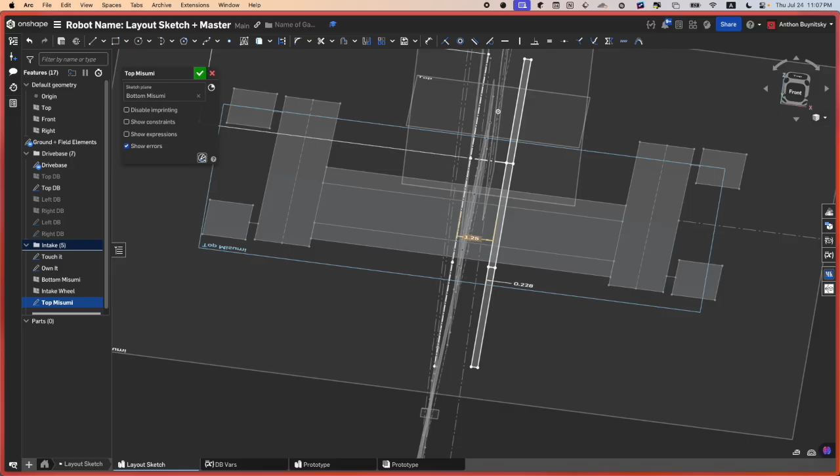Okay, cool. And now I'll just mirror this whole thing over. I have to go into a normal plane. I will select everything here, and then I'm gonna click the mirror. Select mirror, click on the mirror line that I want, and then I just select the right side of the Misumi slides, and there you go. We got ourselves a nice little Misumi slide assembly going.

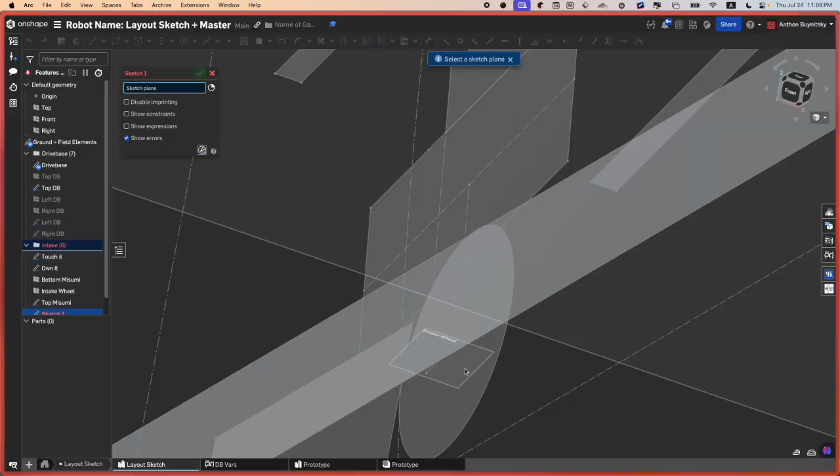All right, and then now the last thing we have to do is create the wheels, or the intake wheels. So for the intake wheels, I'll honestly just make them a bit less than the distance between the Misumi slides. So I'll do this wheels top.

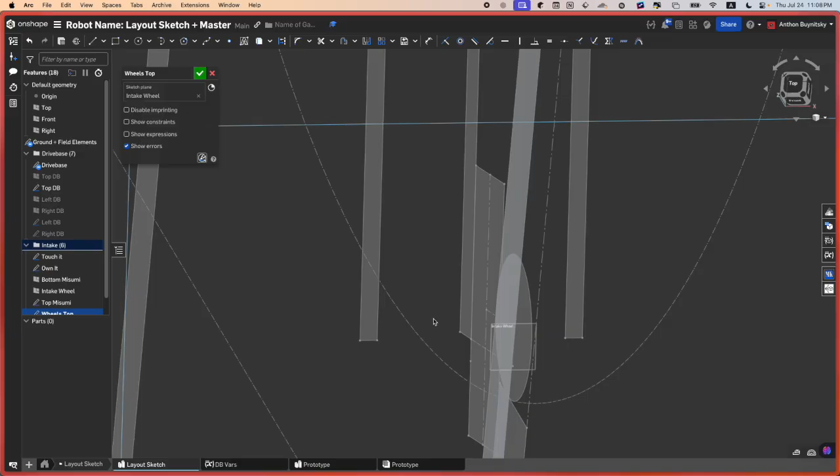Cool. And now I can use the center point of the circle, so right there, and then make a center point rectangle, kind of like that. Dimension the top of it, or coincident it with the, never mind, that doesn't work. What I'll do is actually project this circle, so that creates a line since it is in top view. Then I'll coincident the top point of my rectangle to the top point of this construction line.

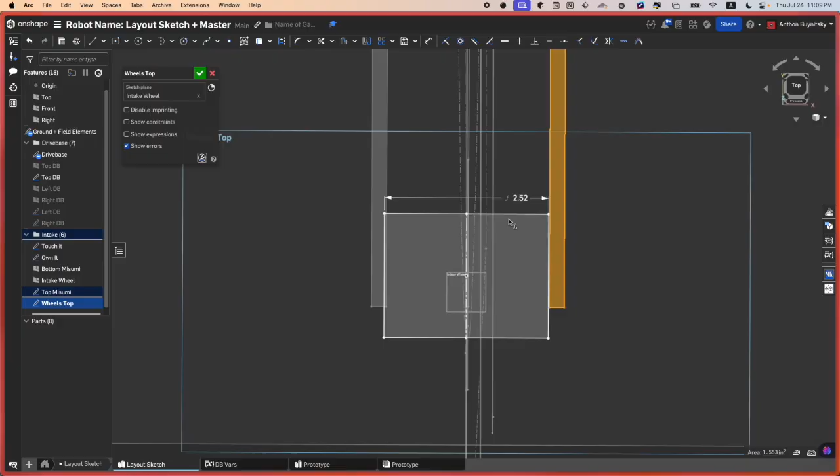And then we're gonna see how wide these wheels are. So 16 millimeters in width. Let's do 16 millimeters times 4. So that is honestly just cutting it. Oof, that is too much. So we'll do 16 millimeters times 3.

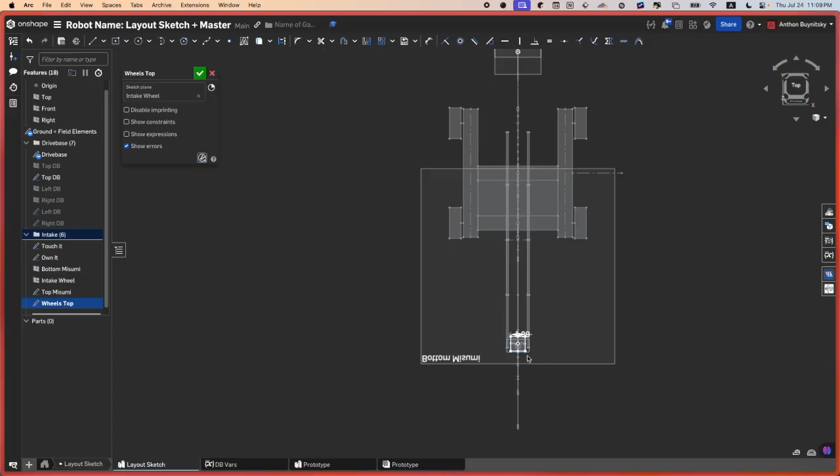Okay, cool. So that is the most basic, simple kind of layout sketch of an intake that you can do. Yours again will probably be a lot more difficult, and as you can see, it still is very simple, no motors at all, just kind of structure, representing it again with rectangles, circles, lines, and construction lines, and that's it.

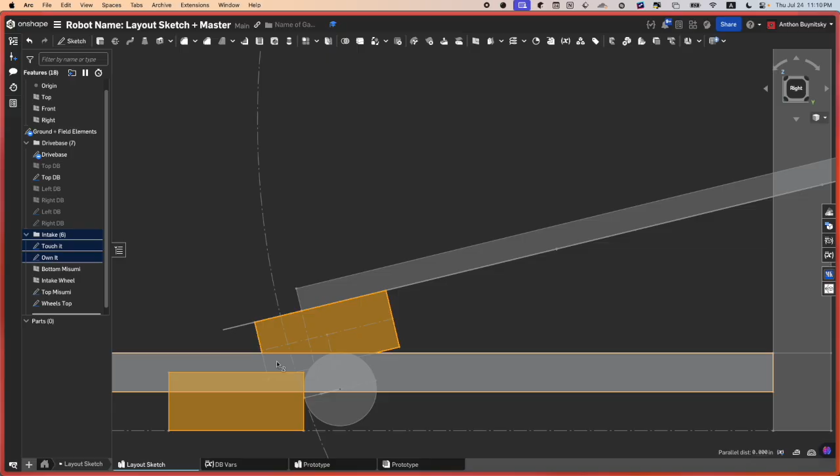So yeah, Raj, any questions? No, nothing. All right, cool, no questions. All right, so then we'll see you guys in the next video where we will try to 3Dify this.